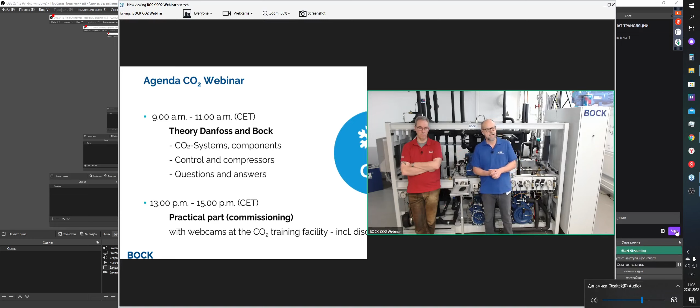So that's the start. What are we going to do today? This morning here in Germany, from 9 a.m. till approximately 11 a.m., we will start with CO2 systems. We will begin with Knut, with the parts of controllers, and he will show you the whole CO2 system, how it works and so on, in theory. When he is finished, I will start at approximately 10 o'clock and show you our compressors.

Then we will have a break, and at 1 p.m. we will start the second part, where we do the commissioning here on our CO2 rack system. This will be the practical part, and we hope to show you a lot of things right on the rack, how to handle CO2, how to start it, and how to fill it. Today we will even fill it, not completely, but I think about 10 kilograms are missing, and that's what we're going to do in the afternoon.

And then, if you have questions, at the end we will have a small discussion, approximately around 3 p.m.

Hello? I think we have problems with the sound. 1, 2, 1, 2. Both? Just a break, we have a problem. Are we online? Okay, now we are back again. We had a small problem, but everything is running stable now.

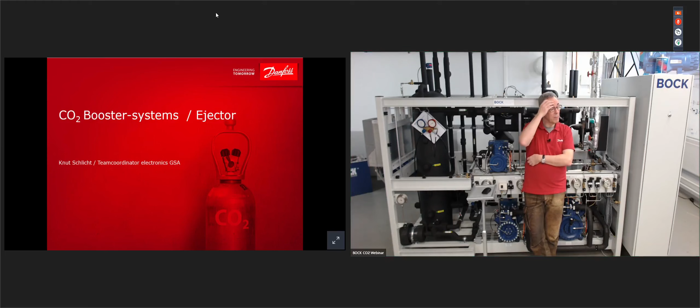Okay, so back to the presentation. What I want to show is a small overview of what I want to present. If you have any questions, just type them in, I will see it on the second screen now. I'm so happy that the second screen is there. And if you want to discuss directly, please raise your hand, and our colleague Yanni will make sure we hear your sound.

So first of all, some facts about CO2. I think everyone will know this, but here's a small summary. You know, high volumetric cooling capacity, so we can even get smaller compressors and smaller lines. You know what we discussed, why we did not have it as a general refrigerant, is that the ODP and the GWP are much lower than the other ones.

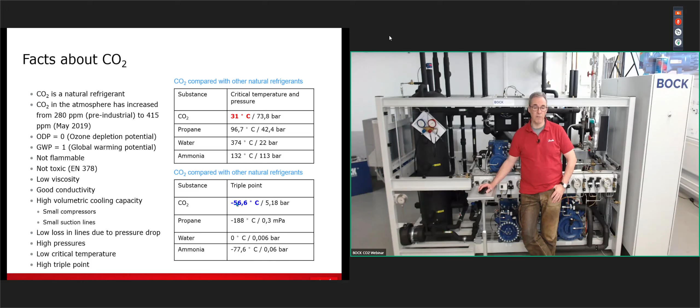You have to recognize that we have 2 points of CO2 that are very important. One is the critical point at 31 degrees, 73, let's make it a round number, 74 bar. The other is the triple point. So you have 2 points, one on the high pressure side and one on the low pressure side. The high pressure side is not so important because we are controlling right through this point, and we are controlling our systems also above this point.

So you just need to remember where the CO2 system is controlling, subcritical or transcritical. You have to remember, when we are talking about transcritical, it's important for the heat recovery. Here in our region for the heat recovery, in other regions where you have very high outside temperatures, there we...

Always control our systems in a transcritical situation. On the lower side, CO2 has a triple point at minus 56, round number minus 57, it's about 5 bars. So it's not possible to get any rooms colder than, I would think, minus 48 or 45, something like this, because if you want to have such low temperatures in a cold room, you have to expand normally lower than this point. But at minus 57, it is the end, because down below you have ice.

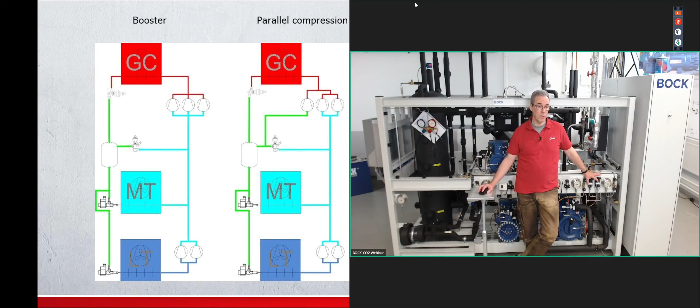So we have several circuits. The controller of the MT compressors is controlling the suction side, the pressure of the suction side. This controller for the high pressure valve is controlling the pressure of the gas cooler side. And this valve is controlling the pressure of the receiver side.

Okay, so the next step was the parallel compressor, how it's working. So you see here also on the high pressure side our MT compressors, but parallel, that's why we call it parallel compression, there is another compressor. Why do we build it in? Because when we are working in a transcritical situation, the MT compressors are working well.

They can control and they work with the high pressure side, but they are not working with a perfect COP. If the high pressure side is going to a transcritical situation, then you have to remember that you have a very big differential between high pressure and suction side. So the COP of these compressors gets bad in transcritical situations. So what can we change? The only thing that we can change is to reduce the mass flow in this line. How do we reduce this?

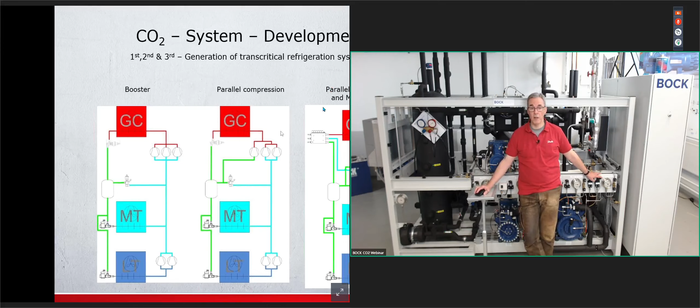The last development of our system, of a CO2 system, was to build in an ejector. An ejector is nothing new. You have to remember that starting with the steam trains, when they stop in the station, you also have to cool some parts of the train. So there was a development of ejectors. Also in old steam trains, they built in ejectors. They have a lot of power, a lot of steam. They put it into a small nozzle and control it, divide it into smaller pressure. And there they find, okay, if we put a line in, then we have suction over this line. But I will explain later how an ejector works.

We come back later. So far, these are the 3 generations of our CO2 system. First of all, booster system. The first development, parallel compressor. Why is it clever to build it in? Because we are working here in a perfect way. We have a constant suction side. And so this compressor is working with a good COP. So we have a wonderful COP here above on the MT compressors. Next step was parallel compressors and ejectors.

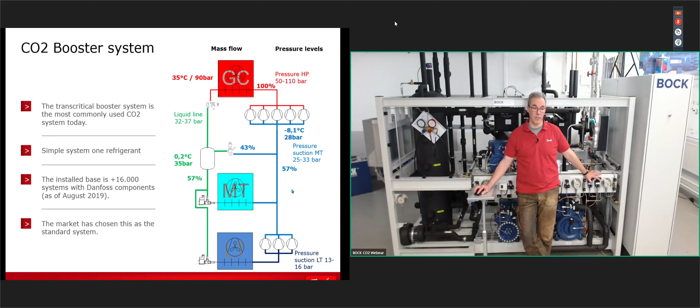Sorry for the interruption, sometimes the sound is gone, we don't know why. Mass flow: 100% coming from all over the parts has to go over the MT compressors, 100% going to the gas cooler, 100% going to the high pressure valve. But here, when we are working transcritical, we are dividing it into 57% liquid and 43% gas. I will show later why it is so. It's always so. Then we are coming back with 57% on the suction side of the MT compressors plus 43% from the gas bypass, and then we are going 100% back into the gas cooler.

The working pressure is another thing than the design pressure. Working pressure: we are working on the high pressure side from 45 or 50 bar up to 110 bars. Normally you can drive your system here at 110 bars, but I will show later it's not clever to go as high.

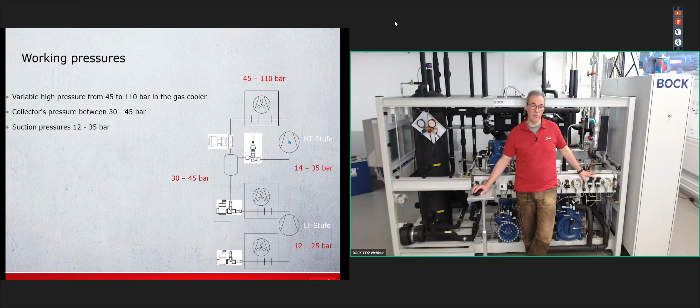In the liquid line, between 30 up to 45 bars. On the suction side, we get the design pressures from the compressor manufacturers, okay? But the design pressure on the high pressure side is a little bit different. The design is how big the pressure is you want to go to. And there you have to be sure that you build in valves that open at 120 or 140 bars, safety valves.

On the high pressure side, some systems are made in stainless steel. Normally, I would say 80% or 90% are working with K65 copper. On the liquid line, we have 2 degrees, normally 37 bar.

The first system, starting at 2008 or 2009, we start with a design pressure of 40 up to 45 bar. But you have to be sure that if this whole system is standing still, there is a standstill cooling, right? If you have a failure at 40 up to 45 bar, you see above 33 bars it's at 2 degrees. If you remember that this receiver is standing in the machine room, and the machine room is not cold, the machine room is always at 20, 25 up to 30 degrees. Then you have to remember that the 30 degrees of the machine room is going even into the receiver, right, if the system is standing still.

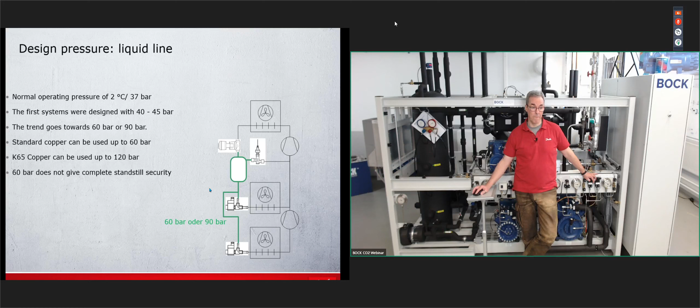The suction side data we get from the manufacturers of the compressors. Even we get this data from BOCK.

So, any questions so far? Yanni, did we receive any questions? I see he's shaking his head, but he's not sleeping. He's just shaking his head because I was asking him, but I didn't see any questions, so I explained it previously in the right way.

Let's see what is happening on the high pressure side. You have to design your high pressure side, as here we see the maximum curve at gas cooler outlet at 40 degrees. But first of all, have a look at COP.

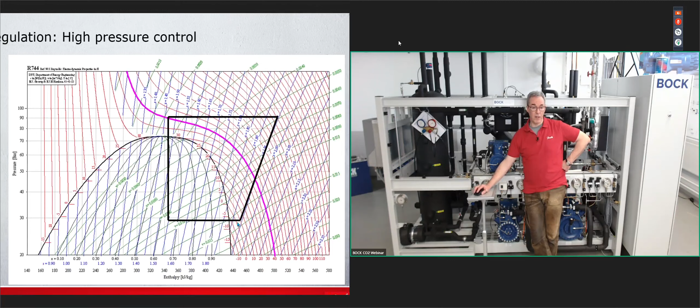What is COP in our cooling system? COP is normally what you put inside a system divided by what you can get out of the system, out of the evaporator, divided by what you put in the compressor, and you get a COP. It's just an example to show what COP is for.

Now, if you put the high pressure higher, then you see this part is bigger than this part, so the COP is going better. You get a better COP when you are rising your high pressure, when you are rising from 90 bar up to 100 bar.

So, why not put the high pressure higher? Because what you get out is lower than what you have to put in, so the COP is going worse.

If you do this for several small circuits, then you see that if your system is working in a transcritical situation, you'd see a line here. Remember our circuit in the H-log-P diagram. This is the line I'm talking about.

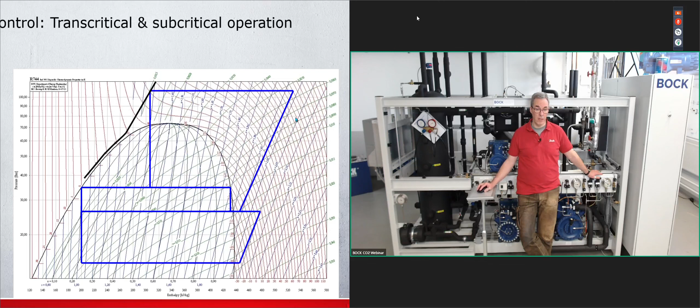So going back to the plus 40 line, this is our design, maximum high pressure side, maximum gas cooler outlet. This is the maximum of our system: the compressor, gas cooler, high pressure valve, and so on. If the outside temperature is going down, our system wants to go down also on the high pressure side.

But not here and not there. Our controller is always looking for this point, for this line. And subcritical, it's clear: subcritical, our gas cooler works as a normal condenser, and then we want to go on the liquid side. But when we are going back on the highest point...

One more, please. Yes, here we are. Highest point? No, I think there will come one more. Yes, I was talking some slides before.

At the maximum high pressure point, at the maximum gas cooler outlet point, I was talking that the CO2 system divides into 2 points: 57% in liquid and 43% in gas, dividing in the receiver between the gas bypass valve and the liquid line.

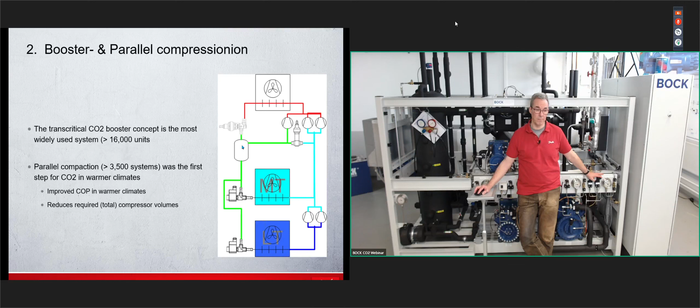That's our thinking of controlling the receiver pressure in a perfect way. Other manufacturers of controllers are doing this in a different way, but our thinking is like that. So why are we building in a parallel compressor?

Let's think about it. Remember, we started working with CO2 systems in 2007 or 2008. There we had a lot of systems with R404, so our CO2 system was compared with R404. And it's absolutely clear, that effect is at an outside temperature of 27 degrees.

Below this, our CO2 systems are working better than an R404 system. But above, in Germany and in Central Europe, where in summertime we normally have a lot of temperatures higher than 27 degrees, we are working not so well as an R404 system.

But when we build in parallel compressors, then we are putting this point up to 38 degrees. And that's why we normally build parallel compressors in Central Europe, just to get a system with a good working COP and a good efficiency. Why are we doing this?

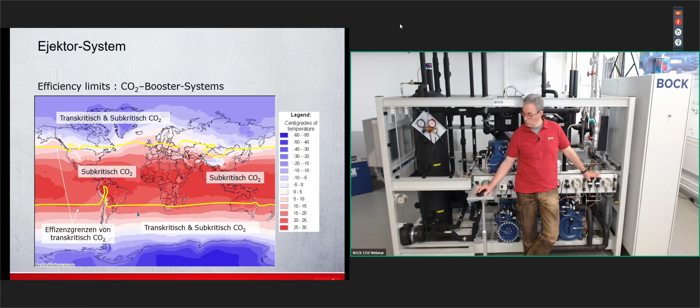You have to remember, CO2 systems in the northern parts, where it's normally always cold enough, with temperatures between 5 and 10 degrees, we did not have any problems there. But if you look at Africa or South America or Australia or India and China, then you will see it's a little bit critical to build in a normal booster system because we are not working well. They are working, but it's better to let the CO2 systems run only in subcritical mode.

But with parallel compressors, we are letting this limit go away, and with ejector systems and built-in ejectors, we can sell CO2 systems all over the world. Transcritical CO2 systems are working all over the world with parallel compressors and ejectors.

So, what is an ejector? Sorry, just a very small break. Get some liquid for the presenter. So, coming back, what is an ejector?

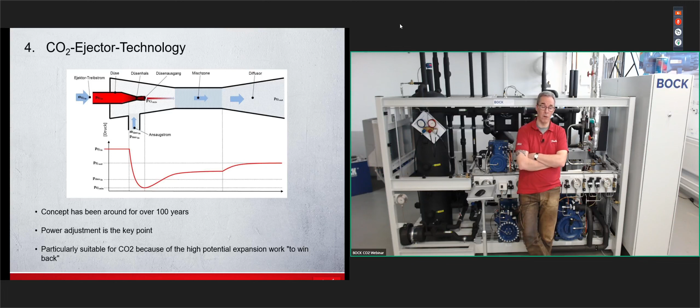An ejector, as I mentioned before, is nothing new. You have to remember, when you are a painter for cars, if you put paint or lacquer on the car, then you always use an ejector. Here you have pressure, here you have the paint, and here you have the car. If you put the pressure through a small nozzle and put a line into this box, then you have a suction here. It's not going this way, the pressure is going this way. So you suck the paint and put it with the air on the car. And this is what we are doing.

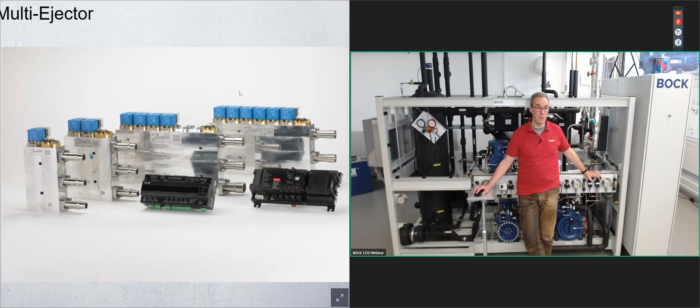Here we are coming from the gas cooler with a high pressure. We put the high pressure through a small nozzle. And when we have a suction from the suction side, then we can suck CO2 from the suction side of the compressors and put this back again into the receiver. Here is the receiver. How it looks: these are our ejectors in different sizes, and this is the controller for the ejector, our pack controller for the ejector.

This is the biggest ejector that we have, with 6 steps, but if you have very, very big systems, you are able to put ejectors in parallel. So, how does it work? Here we are coming from the high pressure side. These are the nozzles: small, bigger, 3rd step and 4th step, so we have 4 steps for nozzles. We are going through a cleaner, just to stop the dirt going into the ejector. And here we are going to the receiver, and this is the suction side.

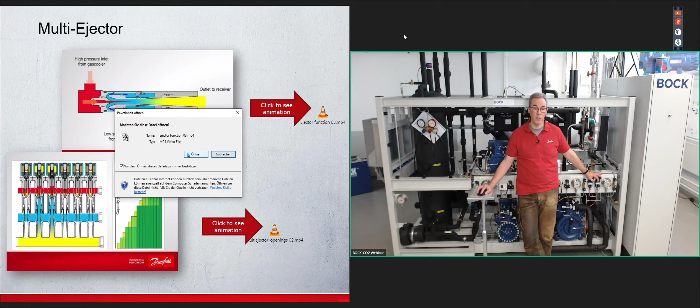So we are coming from the high pressure side, put power on the nozzle and open it, and then the flow is sucked over this channel going into the receiver side. I hope now... We did not test it here, but let's see if it's working. Normally, now here we are. Here you see we are coming from the, oops, sorry, I want to just break it.

Oh, we have some questions, yes. Is there information available about design and selection of components with examples?

You remember you're talking about the design pressure of the whole system. Yes. First of all, it depends where you want to sell or mount the system. If you want to sell or mount the system in the northern part of Europe, in Sweden or in Denmark, then it's easy. You do not have to think about the design pressure, especially on the high pressure side. But if you want to sell a system where it's very hot, India, China, the northern part of Australia, there you have to be sure that your high pressure side is not breaking or exploding. So there you have to think about the design of the high pressure side.

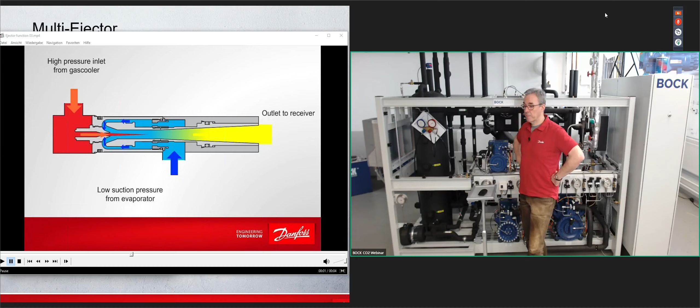Okay, I think I've explained it as much as I can. When something is not clear, please come back to me and I will explain it more. But let's wait until the end. I think I'll go to my slides now.

So here, the ejector coming from the gas cooler. Here we're going to the receiver, and that's the suction side, coming from the suction side of our MT compressors.

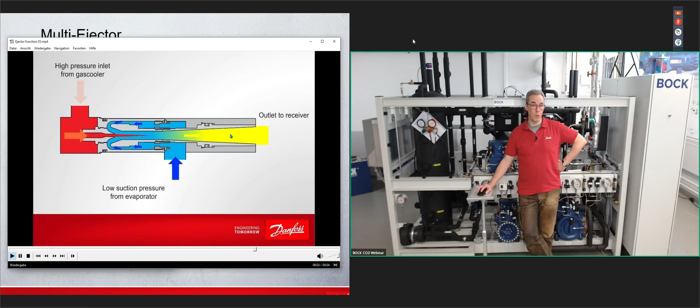Let's play it again. Here we are. That's the way it works. Okay, so now we'll end it here. I don't know if I should stop it or make it small. I'll stop it. Here you see the several steps. I don't want to start this animation, but we're starting with the smallest nozzle, then the second nozzle is starting, then the smallest and the second nozzle together. It's a binary controlling of the valves here.

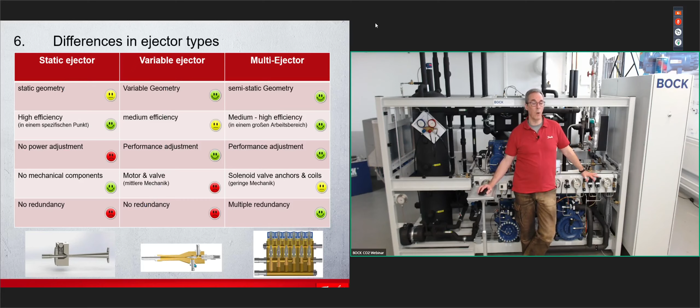Okay, coming back, we have some other things to talk about. There are static ejectors, variable ejectors with only one ejector, and we don't think that's clever because you don't have any redundancy.

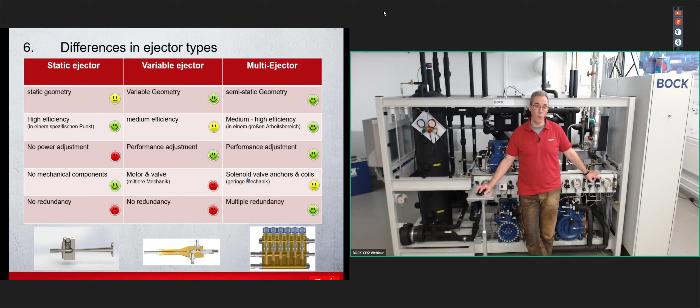If you build with our ejectors, you have to see - you always have surprises - because what I see out in the field, when manufacturers are building the pipes and putting everything together, there's so much dirt in our systems. Back in 2007, 2008, 2009, when anyone was starting with CO2 and was afraid whether it would work or not, these systems were built in a very clean situation. But now CO2 is a normal thing for all the guys building systems, so they're not working very clean, and there's a lot of dirt getting in. We've seen ejectors come back from the field, we open them up, and we find strange things inside. So always be sure that the building of the system is done in a very clean way.

So here we've got our system back again. If we're working in a normal situation, 100% goes over the MT compressors, parallel compressors stop. We're working subcritical, so we're not sucking on this side - 100% going here. As an example, 30% going over here and 70% coming back from the MT compressor - so 30 and 70 make 100 again.

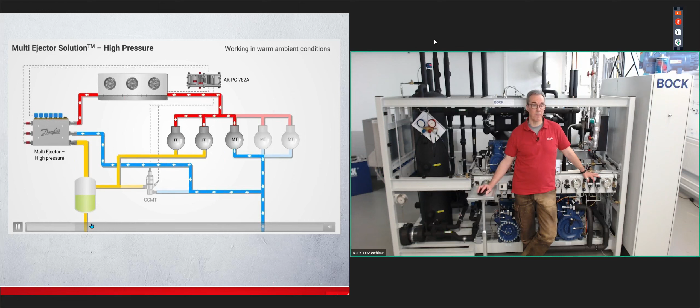Just stop. Here you see normal system, very warm outside temperature. MT compressor is working. IT compressors, parallel compressors is working. This gas bypass valve is stopping. So we are coming with the high pressure side over 73 bars.

So for example, make 80 bar or 90 bar. We are going here, into the ejector and dividing it into the liquid line and sucking out of the suction side of the MT compressor. Here you see the several steps working of the ejector.

But normally, the ejector is not only working for higher outside temperatures, it's also working in cold condition. So when it's cold, when we are working subcritical, we do not have so much mass flow. The IT compressors are not working. MT compressors are working. We are here now working with a pressure of 55, 50 or 60 bars, not higher than that.

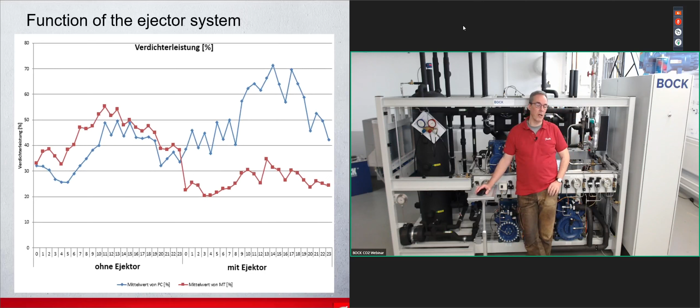Functions of the ejector. We are not showing animations anymore. Now we are coming back to the facts. If you put this into a graph, then you see here when we are working without ejector and with ejector, then you see on the suction side of the MT compressors where the pressure is going down, especially when the ejector is starting to work.

Energy saving, we are talking about especially in Europe, very deep in energy saving. So if you have a look on the outside temperature, as high as better the saving. So we are talking about gas ejectors, high pressure ejectors. We have a very good controlling of the high pressure side.

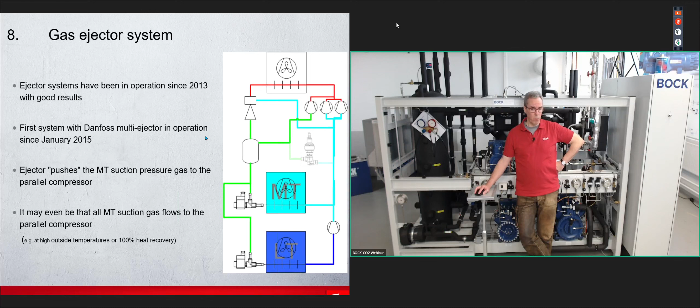We optimized with parallel compressors the COP of the whole system. Ejectors built in, we are sucking here. What else can we do? If you see the cooling, the coolers for the cabinets or for the cold rooms.

Then normally we have to be sure that on the suction side you do not get any liquid, right? So when we work with our AKV, with our electrical valves, then we always control here a positive superheat, right? Because only when we are positive on the suction side, then we did not get any liquid. But when we control the coolers with positive superheat, then we are not working the whole area of the cooler.

We are using a part only for the superheat. We are not using this part for cooling the goods, for cooling the temperature in the cold rooms, right? So isn't it clever to use the whole cooler for cooling down the goods?

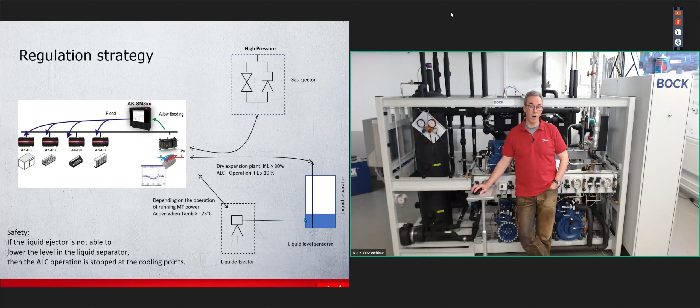Here you see this circle—something wrong? No? Everything clear? Okay.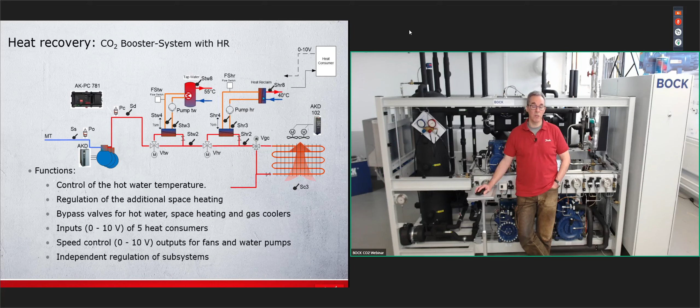Here we have the compressors. Here you see the first step of the heat recovery and the second step of the heat recovery. First step, we are talking about heating up tap water. Second step is heat reclaim for heating up the building, and only one controller is controlling the whole site. Here you see again the heat recovery for tap water and the heat recovery for the more normal heating of the building.

And here I'm talking about not going as high as you want with the pressure of the system. You always have to recognize that all our systems, the cooling system has a COP, and the heating system has a COP. So there are several things to recognize, and several COPs have several curves.

If you look at the best envelope to let our CO2 system work in transcritical mode, it's not 90 or 95 or 100 or 110 bars. No, it's between 75 and 85 bars. So remember this - and it's not only Danfoss saying it, just ask some heating guys and they will explain this also to you.

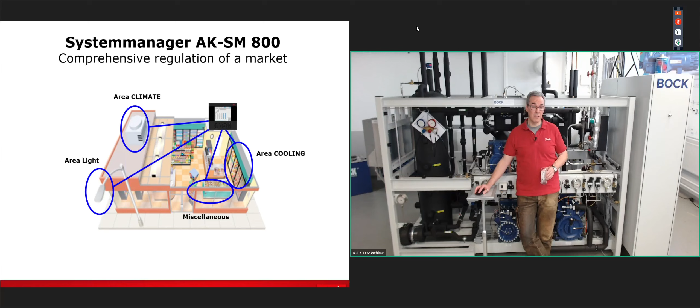So what else do I want to show? Coming back to some slides for what we are else doing - our system managers are controlling not only the cooling system, they can also control climate, light, and something else at heating, or controlling whatever you want.

From Danfoss, you get anything you want to be happy, but in our times now, I always have to tell you that we have some delivery problems. So if you want to order something, be happy if you get something. But normally, any parts of a cooling system, Danfoss is able to deliver - starting with a frequency converter, a valve, a gas warning system. You can get anything out of our delivery parts.

The question, why natural refrigerants. Every one of you has discussed this point a lot of times and heard about it a lot of times. The standards and regulations are going more and more towards natural refrigerants. We are going away from the synthetical refrigerants. Why? Of course, because of the environment, the global warming and all these themes. But you guys know why you are here today, and I think every one of us is clear that we will have in the future much more applications with natural refrigerants.

And I think it will be normal for us in about, let's say, 5 to at least 10 years that we will work most of the time with natural refrigerants. Yeah, footprint, CO2 footprint - of course we want to leave a world for our children, for our grandchildren where they can also live. It's also very important, and we at the company BOCK, we see it as a big responsibility on our side.

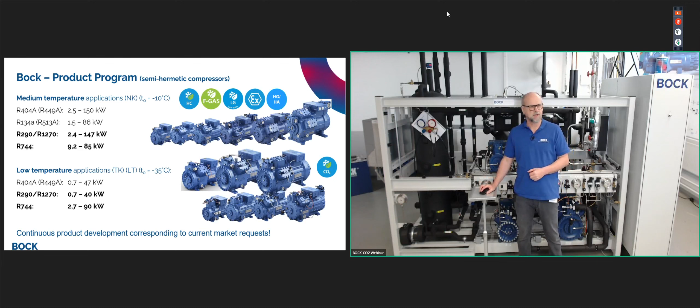BOCK compressors, well known for most of you guys. We have a quite wide range, also of course for synthetical refrigerants. I have a small overview of our whole system or compressor range that we have, for medium temperature applications and for low temperature applications we have special compressors, as you can see in our catalogs. But today we are talking about our CO2 transcritical and subcritical compressors.

Why that? You could see that at the explanation of Knut. We have separating a CO2 booster system in a subcritical part and in a transcritical part. So here at BOCK we have a really wide range, meanwhile, of CO2 compressors. I'm starting just with the subcritical compressors of our range.

Here you can see the smallest, the HG-X12 subcritical. It's the smallest up to the HGX22. These both are 2-cylinder compressors. Then we have the HG-34, this is a 4-cylinder CO2 subcritical, and the biggest subcritical, the HG-X44.

What we have very new now is the HG-X24 CO2 LT. LT stands for low temperature. We have the same model also for high temperature as a transcritical. This is a mixture.

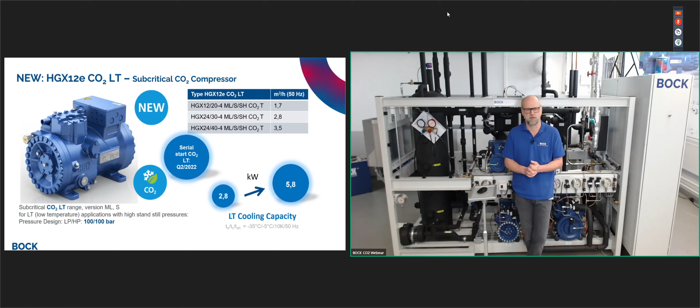So that means our subcritical product range program goes from 1.6 kilowatt up to 49.2 kilowatt with the biggest 4-cylinder subcritical compressor. So you can see you have a really quite great range to choose between our compressors here.

Additionally to this range, of course, another new thing will be coming up in the second quarter of this year, 2022. This will be the HGX12e CO2 LT compressor. It's the same, like I said before, we will have also the possibility to go up here on the low temperature side up to 100 bar. And there we will have also a range then from 1.7 up to 3.5 with this small LT CO2 subcritical compressor.

Additional, of course, to the subcritical compressors, we have also a nice range of transcritical compressors. And here we also have now brand new, I think last week we started with the production and it's released - you can buy the newest 2-cylinder, the smallest transcritical 2-cylinder in our house, the HGX12 CO2T. It's a small 2-cylinder compressor. Then we have, like I said before, the HGX24 transcritical.

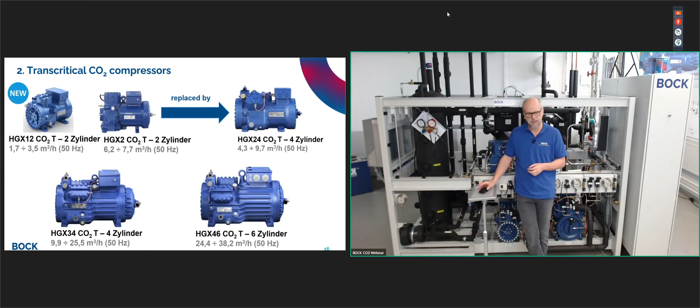Just a few words about the HGX24 CO2 transcritical. This one, of course, is released to 100 bar on the low pressure side and 150 bar on the high pressure side. Goes from 4.3 cubic meter per hour up to 9.7 cubic meters per hour, and also available in 3 versions: the ML, the S, and the SH version.

Maybe we have time later, and we can pop up our VAP, the compressor selection program, where we can see how you can select these compressors. Cooling capacity from 9 kilowatt up to 21 kilowatt with this 4-cylinder transcritical compressor. What's cool about that also is that we have here a 4-cylinder where not all of our competitors have a 4-cylinder, then they have a 2-cylinder.

And as you know, guys, outside, a 4-cylinder has always a much more smooth running, much better smooth running than a 2-cylinder. And we are known for compressors, for very smooth running compressors. And this guy here, the HGX24, is really, it's for CO2 compressor transcritical, fantastic how smooth he's running. And we have him built in here since almost, I think, almost a year now.

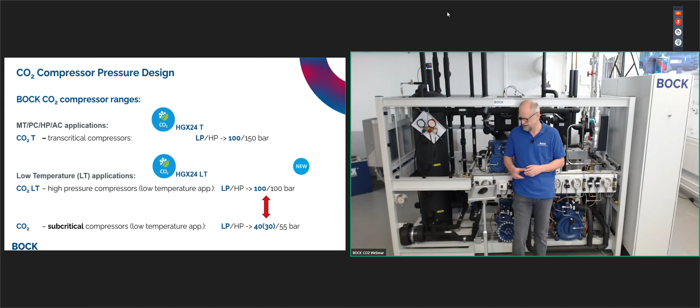So why have we done this with these LT compressors, with 100 bar suction side, 100 bar discharge side? We can see that more and more applications are changing the systems. People build other systems. At the beginning, as you can see in the picture, they had normal systems - 100 bar, 55 bar on the high pressure side, and up to 40 or even 30 bar on the low pressure side. That's similar to our system at the moment.

We don't need higher pressures here in the training center, so we chose the normal version. But more and more companies outside change and design systems with even higher pressures, as you can see here on the low pressure side, up to 100 bar. Of course, that's the choice of the rack designer - he has to know what he wants and needs, and then design his system. But anyway, we are prepared for everything you need in the market here at BOCK.

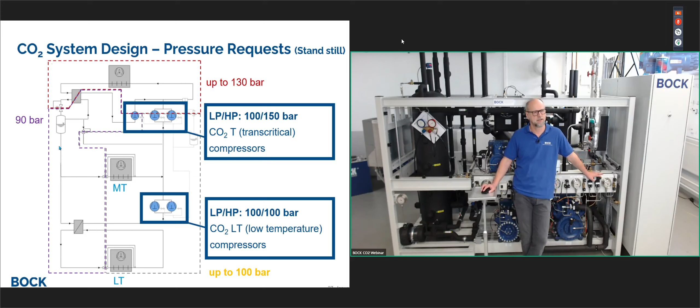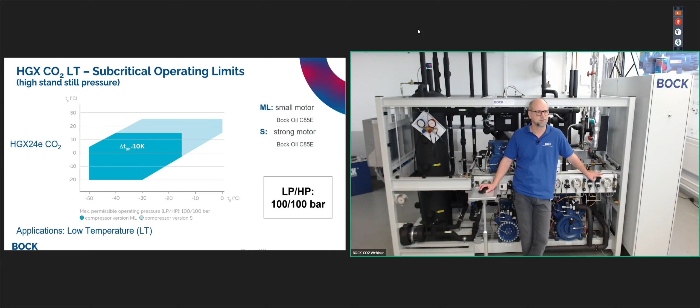Here I am again. Compared, if you take a compressor system with

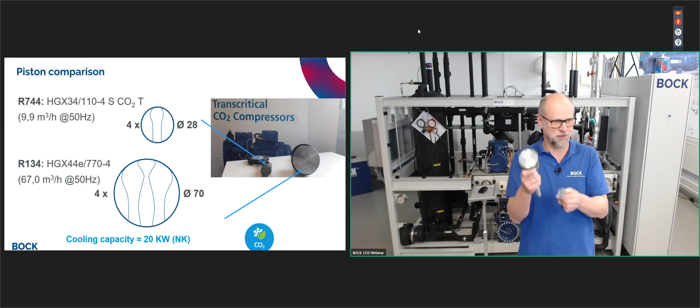R134, you will find inside the four-cylinder in the HGX44, 4 of these pistons, this size. And if you compare it now with the same size for the same capacity with the CO2 compressor, then the size of the piston is like this: 4 of them, and 4 of them in 134, and this is CO2.

That's due to the big volumetric capacity of CO2. That's really fantastic. So that means the compressors, the components of the compressor can be smaller, but also... I will just put it away again.

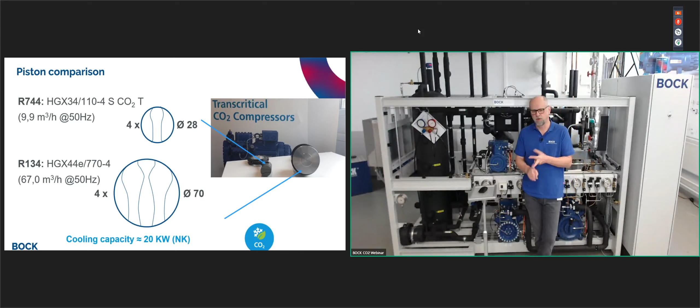But that also counts for the other components like heat exchangers, evaporators, and even the pipings. The size of the pipings, you can choose them much smaller than as you know it from R134. And that's a part that's very important in my eyes, because of course the CO2 application at the moment is a bit more expensive than a normal synthetical application. But on the other hand, you can save money with smaller piping, smaller evaporators, and so on and so on.

We will just come to the point of safety because of this high pressure that we have here. But believe me, for all of you who are not working with CO2 at the moment and who will begin to work with it, it sounds a lot: high pressures of 100 bar, 110 on your system, low pressure sides 55, 60 bar. But after working with it for a while, it gets absolutely normal. That's how my impression was with CO2.

For us in the company, we are building these compressors. That means if you produce a compressor for such high pressures, you have to test them. In our production, we make burst pressure tests, I think once or twice a year. And that means we use 3 times the normal pressure as the test pressure.

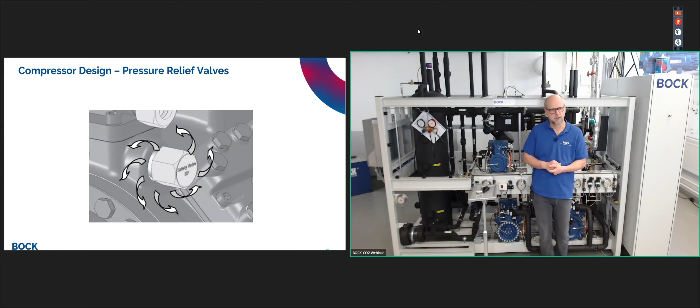And of course, our safety valves are only for our compressors. They don't replace any safety valves in your system. Be aware of that - you have to put additional safety valves in your system. Here you can see a better picture of how the gas flows out of the safety valve in case of opening.

Efficiency. Especially our new compressors and the whole range of transcritical compressors have really great efficiency. And how do we do that? We have really clever compressor thermal management.

You can see it on the picture here. That's a cylinder head - here's the small one, here's the 4-cylinder. In the cylinder head, we separate the two sides, the discharge side and the suction side. That's important because you don't get additional superheat, and if you don't get unnecessary additional superheat, that's good for the efficiency of the compressor.

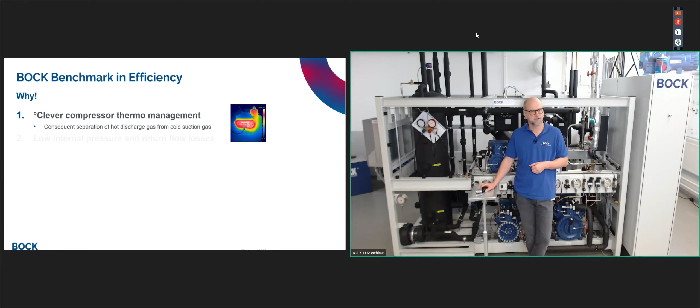Consequent separation of hot discharge - we have very low internal pressure and return flow losses. That's also through our design inside the cylinder heads, inside the compressor.

Low compressor oil carryover, of course. Why do we have that? In every compressor we have an oil pump. That's standard at BOCK - every compressor, every size has an oil pump.

So, individual optimized components: motor, driving gear, valve plates, and so on. The market efficiency is very great at BOCK.

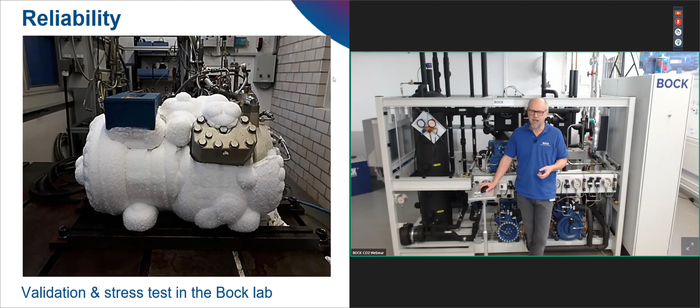Also, validation stress tests, which we do with every compressor in our validation lab. They have a really hard time there, as you can see in the picture, but we need it for the reliability. We have to know where we can make the compressor better, and how the parts look after such a test. We are testing everything here for you, so it is important that you have a reliable BOCK compressor.

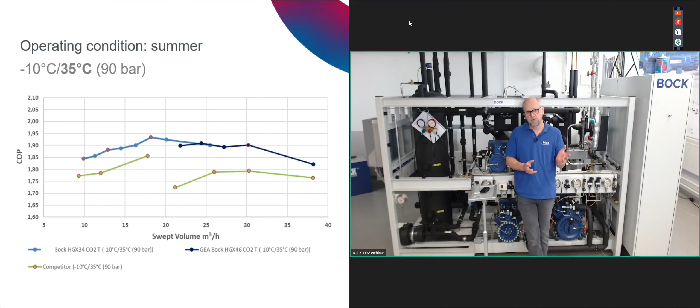Efficiency benchmark compared to our competitors. Guys, this is all with normal standard motors, not permanent magnet motors. We don't have them at the moment, but we are working on it. As you know, if you have a compressor with permanent magnet motors, you have to pay approximately 30% more. So if you compare our compressors with the competitors using standard motors, we have really very good efficiency, from 4.4% up to 7.3% higher than our competitors.

And what do you want, and what does your customer want? He wants to save money, he wants to save energy costs. So BOCK is the right choice for you and your customer.

Durability: we have a high pressure design, and we have the highest efficiency, certified by ASERCOM - we'll show you that later. We have oil pumps, high reliability with optimized drive gear, and operating limits for each application. We talked about that.

Variable speed drive for all compressors, of course, 20 to 70 hertz released for the 4 to 6 cylinders. And we have a very low oil carryover due to our oil system. That's very important: with 50 hertz, only 0.2% of the mass flow is oil, and with 60 hertz, only 0.5%.

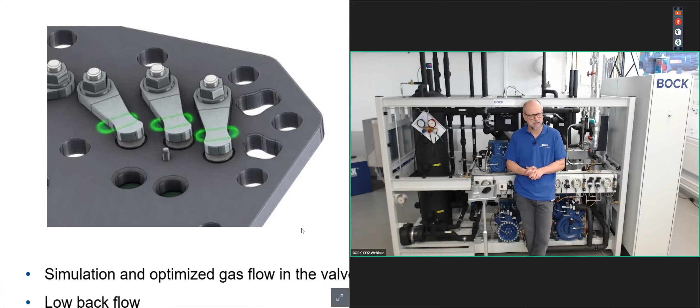Optimized valve plates as well, very important. We check the simulation with several programs we have in house, to check the optimum gas flow in a valve plate or in the whole cylinder head. Through our construction, we have a low backflow of the discharge gas.

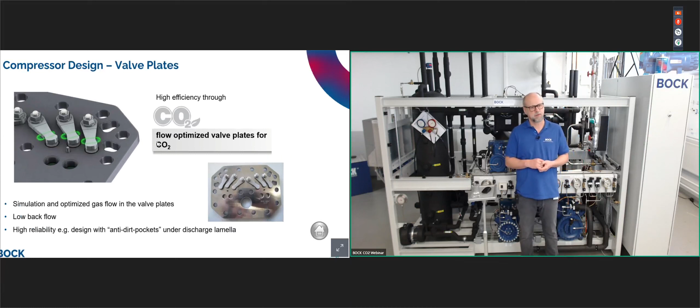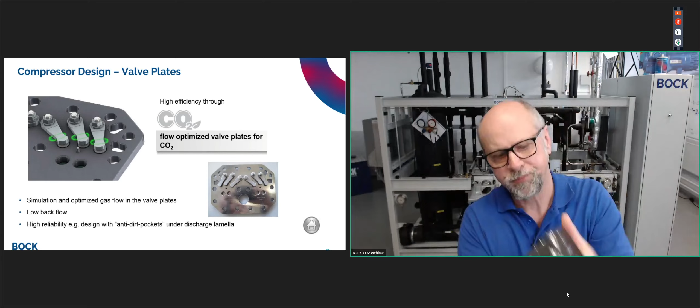And high reliability because of our anti-dirt pockets under the discharge lamellas. I will show you - this is also something special that we have. I hope you guys can see that; I just checked that here. Yes, you see under the lamella these pockets that are phrased into the material. Maybe it's better more inside, here under these lamellas - yeah, guys, you can see these pockets. Where are these pockets here?

They avoid - let's say you have a bit of dirt in the system, or in the oil, or whatever - it won't block your lamella. If this dirt comes to this part, then through this pocket, the discharge gas can take it with it. It has very high speed discharge gas, we know that. So you avoid collecting dirt under the lamella.

So what happens if you don't have this, or what could happen? What could happen is that your lamella, without dirt pockets - the dirt is under the lamella, you get more and more dirt, and the lamella, let's say, goes that way, not straight like it should be, because of the dirt under the lamella, and then it can break. Nobody wants a broken discharge lamella in the compressor, because what happens: you get the backflow, the discharge temperature gets higher and higher, and poof, that's it.

It's not good for your oil - your oil gets burned. Then in this cylinder, the piston will have damage as well, and the surface of the piston. That's why we have in every of the CO2 valve plates these anti-dirt pockets, called. Yeah, really a good thing, great thing. So we'll bring that back.

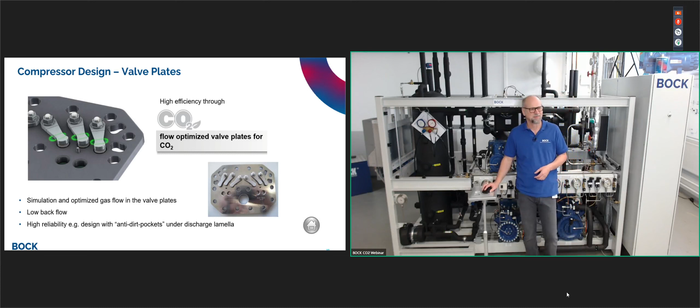We want to show you also something inside our compressor, because that's important for the reliability. Not only outside do they look fantastic, but inside also. The compressor oil management - just a few words about that. That's our philosophy: the oil pump in every compressor.

I think you can see it here. Due to the oil pump, the oil level, we can keep it very low in the compressor. So that means you will always see it in the sight glass. And if you compare it to others who don't have an oil pump, they will have much more turbulence in the sight glass than our compressors. The oil pump sucks the oil and brings it directly there in the crankshaft, directly where we need the oil, guys.

So we have a fantastic oil circulation inside the compressor. We have a great oil refrigerant separation. We have also a separation between the motor side and the crankshaft side. And if you compare it here, the open oil management, we can reduce with our special optimized oil management the oil flow, the oil throw in the system.

And I think everybody of you knows, first, it's good to have the oil there where you need it, and not in other components where you don't want it, or you don't want it more than needed. Evaporators, for example. So that means with optimized oil management, you have also a better efficiency in your system. That's also very important.

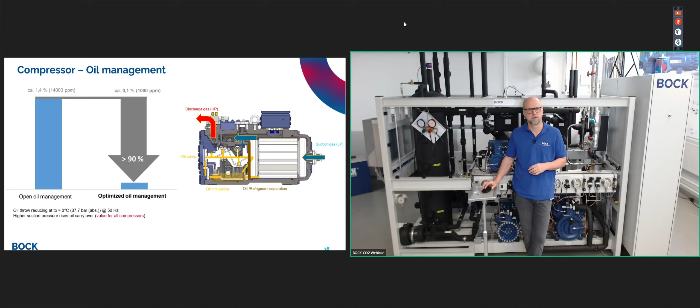Operating, like I said before, you will hear in the afternoon a very low pulsation that we have here with our compressors. We have operating conditions LT, MT, and for high pressure applications, for heat pumps, we have a variable speed drive. For the 4 cylinders, up to 6 cylinders, we can go 20 to 70 Hertz. For the subcritical 2 cylinders, 30 to 70 Hertz, and for the 4 cylinders, 25 to 70 Hertz.

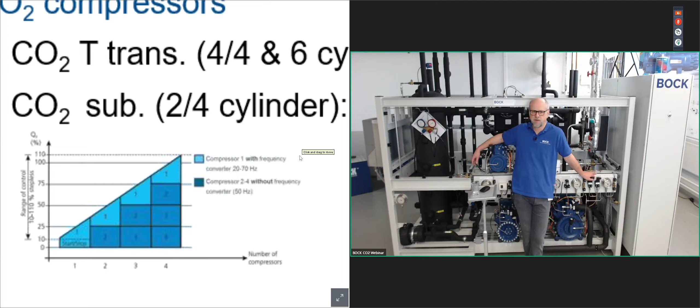We will show you that also in the afternoon, because every compressor on our application here, on our rack, has a Danfoss variable speed drive. You can see them on that side. You will see it later. We will show you the frequencies. Flexible connections are possible. You can turn that in any way you want. The valves, compact dimensions, very low noise level, and a very good running behavior.

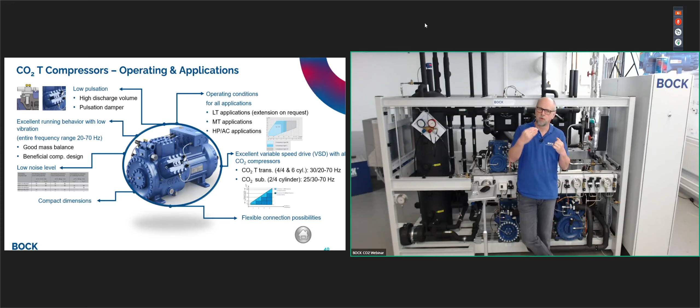Talked about it. We do that through a good mass balance in our compressor design. And low pulsation also, of course. How to achieve that? Of course, if you work on your cylinder head, you have a high discharge volume. We have pulsation dampers inside the cylinder head, which lowers, of course, the pulsations. This point is also very necessary. You don't want to have high pulsation in discharge pipes, of course. And all our programs, I will show you that later, the programs that we have.

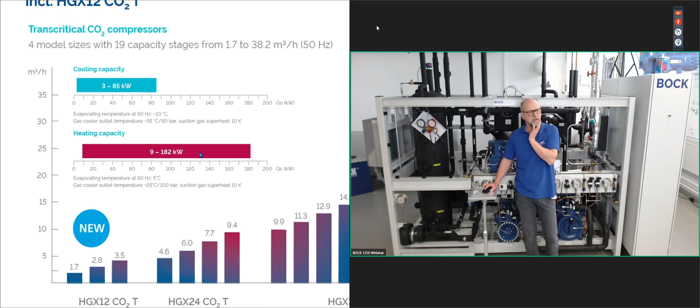So the whole product range for transcritical is up from the HGX12, from the smallest 2-cylinder, from 1.7 m³/h up to 38.2 m³/h with our biggest 6-cylinder, HGX46. So we have 4 model sizes with 19 capacity stages. I think that's a great range. Cooling capacity from 3. It's not true. We forgot now. They were from 1.7 to 85, and heating capacity from 9 up to 182 kilowatt in all the system.

What we also want to show you, because I don't know, most of you maybe know it, we have a bit of separation in the company. We have a stationary part, which are we here, with guys with the stationary compressors. But we have, of course, also a mobile part. Our colleagues who work for the mobile part in the company, the mobile compressors, FK compressors. And I just want to show you a small overview of what is happening here. I mean, the future drives electric.

You can see that it started with the buses here in Germany or worldwide. Meanwhile, we have more and more electric buses. But also when I look in the paper, I see the numbers in the newspaper, of course, as you can read, that the numbers of electrical vehicles in Germany, in Europe, is rising. Really, really very strong. But we are working especially on the bus systems and train systems and ship systems, of course, not on normal cars.

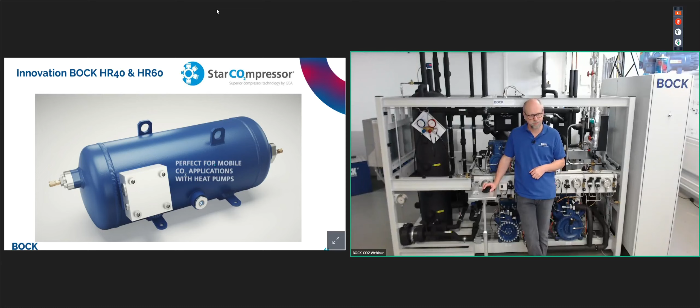So our innovation here since last year, or even 2 years, meanwhile, is the BOCK HR40. It was the first one. And since last year, available also the HR60. The 40 is a 4-cylinder, the 60 is a 6-cylinder. It's a so-called star compressor. It's a transcritical CO2 compressor, a full hermetic, as you can see. This was a cooperation development with Mercedes-Benz, together with Konvekta, who are building air conditioning parts for Mercedes-Benz or other bus brands as well. Project started even in 2013, and the result was the world's first serial CO2 heat pump system for electrical buses, powered by the BOCK HR40. We are very proud of this.

It's meanwhile very successful.

Because to have a CO2 compressor in such a small size in an electrical bus gives you a lot of possibilities. You have electrical bus, you have to cool, of course, also in the summer, but you have to heat in the winter. You don't have a normal motor as you know it before, because the motor gave its warm power to the inside of the bus, and so you could heat the bus. That's not possible with the electric bus, and that's why you need a really efficient compressor to get as much heat as possible in the bus.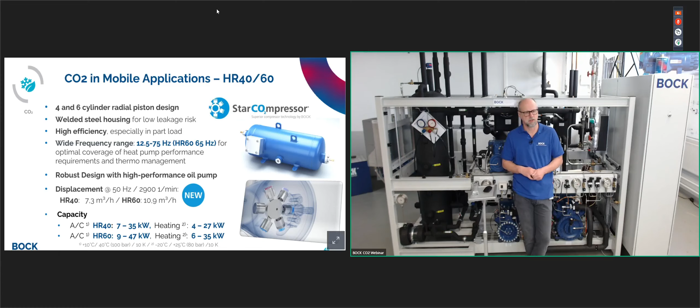Yeah, that was our also very new invention, the HR compressor. At the moment, more and more companies ask, oh, can we use it also in stationary applications? Yeah, we're working on that, and normally you can use it, of course. It's at the moment in the market for buses, but I think we will see this guy also in smaller heat pumps and in smaller cooling solutions, with CO2.

For you guys, what we also have, of course, is our VAP, our BOCK selection program, which you can find on the internet. Really good program. Can we open that up quickly? I will just show you in a few steps. I think we have a few minutes left. Yali will open that for us.

Just give us a few seconds, please.

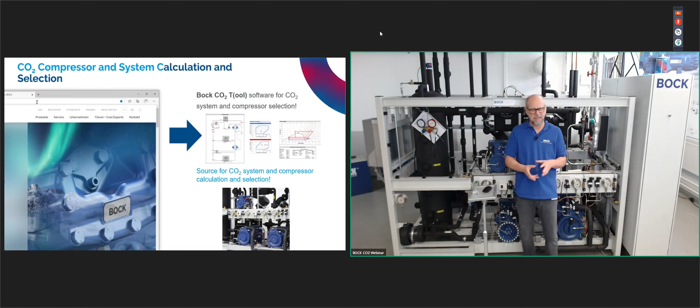So the program is in the internet, but you can load it down, of course, as well, and then you have it on your personal computer. But I would suggest to always work on the actual internet version, because here you have always the newest data inside, you know.

So, okay, here on the BOCK page, you can find also the VAP. It does not work at the moment.

Do it by hand, Janni. We don't have an internet connection at the moment, it looks like. That's strange. Okay, maybe we can do that in the afternoon as well. At the moment, we have small problems here.

Okay, guys, yeah, really a great program, but here you can only select data for one compressor. If you want to collect information and you want to calculate a system, a rack system like this, then...

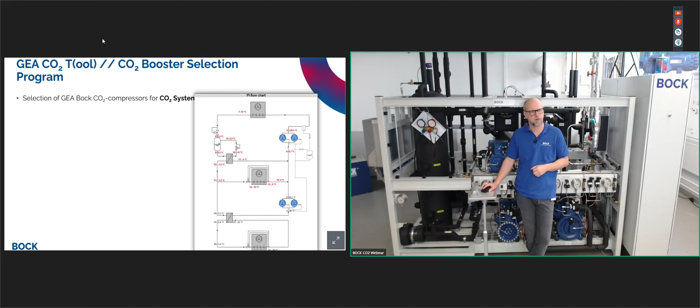You can use our BOCK CO2 tool software. It's an Excel-based software. Please get in contact with your sales manager, with the responsible one, and he will send you this program. With this special CO2 booster selection program, you can design a booster system, low temperature, middle temperature, and parallel compressor.

Or you can design only a booster system with only low temperature or only middle temperature. You can design also a heat recovery. The software tool is based on Microsoft Excel, and that's a product that we have, and we can send it to you. You can start to work with it.

And you can also make a small... here, software is available on request, just get in contact with us, and we will give you the software. Here you can see the software on one side. On the left side, you can choose what you need, the capacity of your system, or it's only for CO2, of course, the rack system for CO2. The capacity of the system on the low temperature side, on the middle temperature side, and the parallel compressor as well.

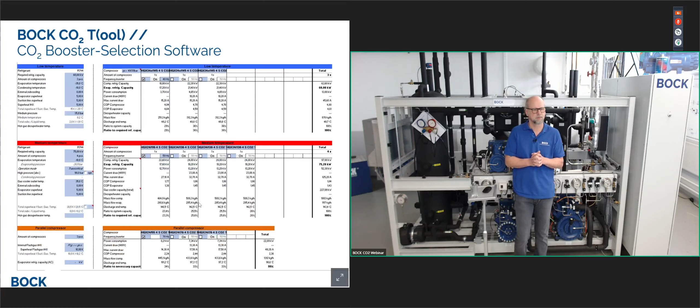In the middle part, you choose the compressors, and then you will have the results on the right side. So input, output, low temperature, middle temperature, parallel compressor, as you see on the downside. You get all the calculated data, and you will see it in this program with temperatures and pressures.

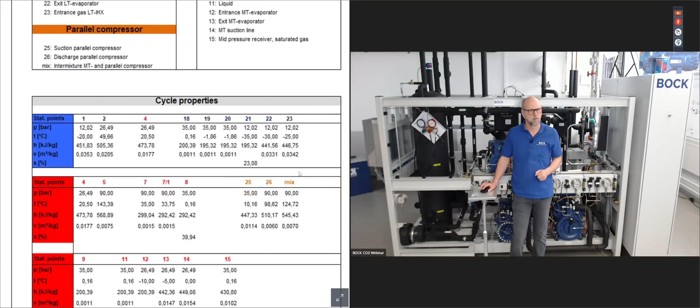Middle temperature, subcritical compressors, transcritical compressors, everything that you want, you can find inside here. Like I said before, if you start with CO2 to get a bit of training, it's also good. You can play around here with the working points, with the compressor sizes, and get a better feeling for CO2 applications.

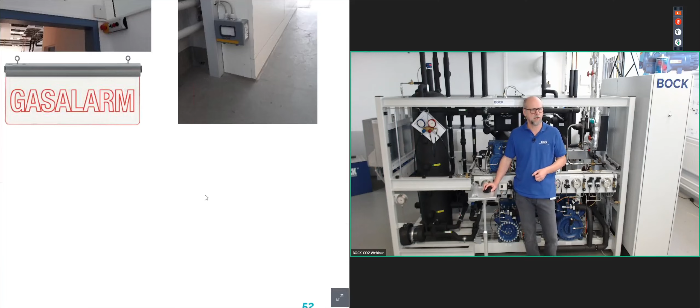Okay, we are coming to the end of the first part. What we also thought is important to show you is safety components in the CO2 system, especially here in the machine room. We know if you breathe in too much CO2, it's not good for your health. It can even become a really serious problem.

So every system has to have safety components in the machine room, as here. Or even if you don't need it inside the supermarket, if you have cabinets or storages, you need that inside them. In our system here, you can see we have CO2 detectors, for example, like here. We have two of them in our room.

We have a ventilation, that's on that side. We will show you in the afternoon. If you have enough time, we will have a small test in the afternoon. We'll do a test run.

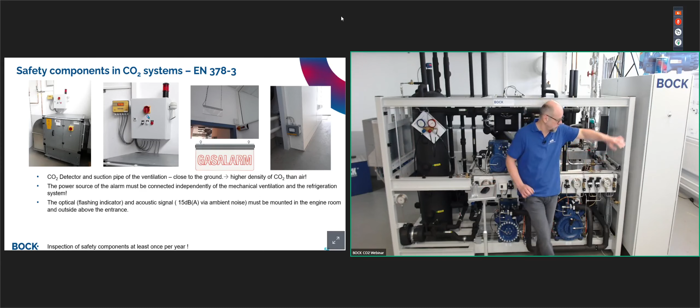Important is that your power source here is not the same power source as you have for the rack system. This has to be a separate one, because in case you have power source problems in the rack system, this one should still work in case of a leakage in the machine room.

You need an optical signal, a flashing indicator. You will see that later, or you can see it here, so that you know there's something wrong, there's an alarm. You also need an additional acoustic signal, so you can hear that something is wrong in this room, and maybe it's better to get outside.

We have two stages in our system. The first stage is a pre-alarm at 5,000 parts per million. Then the optical display starts and the mechanical ventilation is activated. The system will still run then.

But in the second stage, if the amount of CO2 in the gas gets higher, you get the main alarm at 10,000 parts per million. Then you get the additional acoustic alarm signal and the shutdown of the whole system.